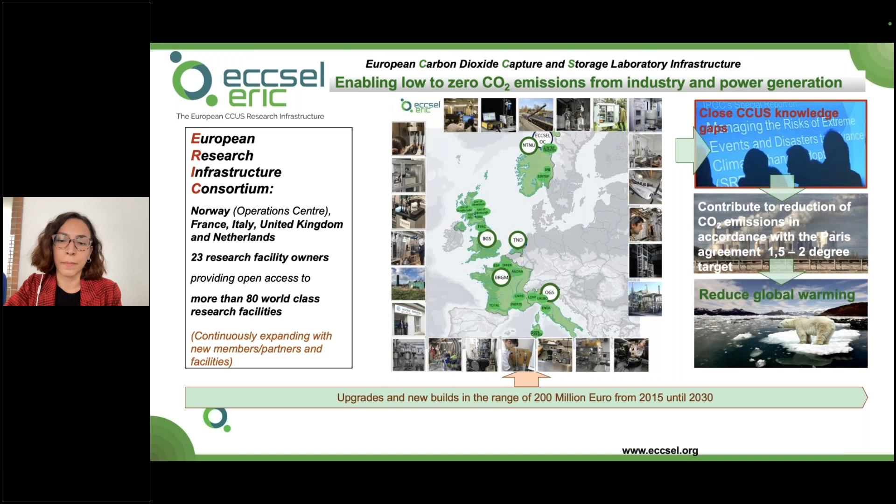Within the ECCSEL ERIC consortium, we have the ECCSELERATE project, which was initiated in 2020, and it will end next month, so at the end of 2023. This ECCSELERATE project is funded by the European Union, and it has many goals. So for instance, increasing the use and long-term sustainable operation of the infrastructure within the ECCSEL ERIC, but also developing marketing, access, and services models for industry and also small and medium enterprises, increasing the international collaboration and expanding the national nodes, and also expand research from CCS to CCUS, so also including utilization, and maybe expand research also on an industrial level.

In doing so, the ECCSELERATE project has a capacity building program with many activities inside. So one of these is, for instance, the series of webinars we are attending right now, but we also have specific workshops and summer schools and dedicated training courses.

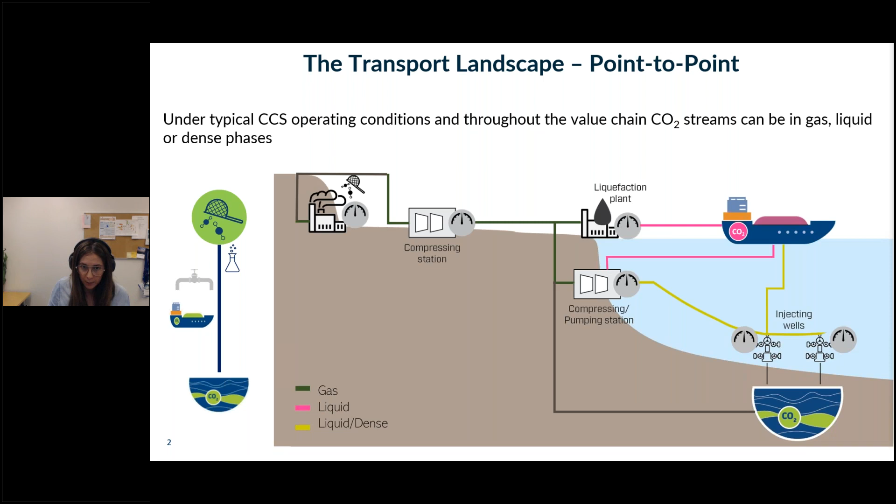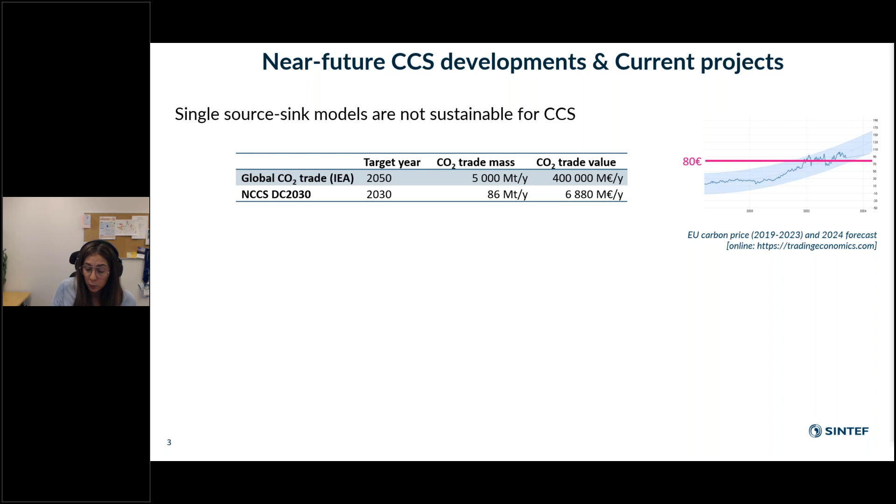However, if we look at the volumes of CO2 that we will have to trade and to inject in order to meet the climate targets, we see that these source to sink models are not sustainable for upscaling CCS. What we are seeing is that from where we are now, which is practically no CCS projects injecting CO2, to where we need to be by 2050, which we're talking around 5 gigatons of CO2 stored per year, we will need an exponential increase of the CO2 traded and injected.

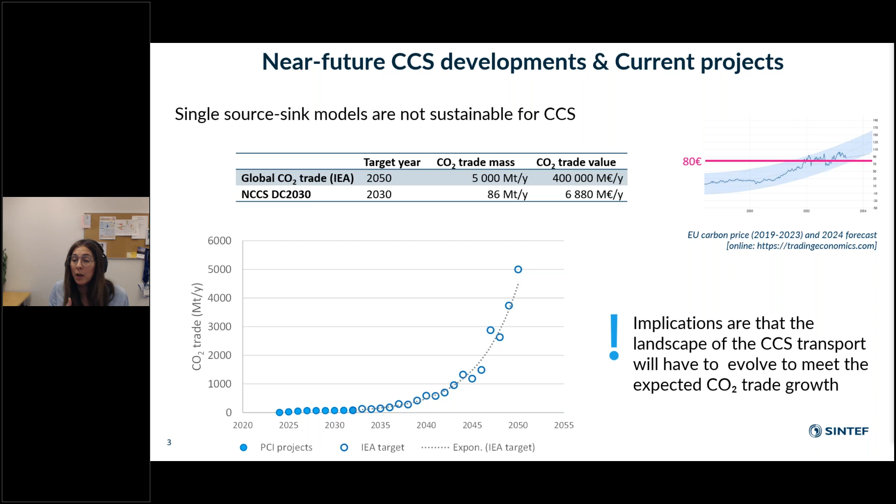And the implications of this is that the landscape for CCS will, of course, have to evolve in order to meet these needs. How we're seeing this evolution of the way we are transporting CO2 and the way also that we do business, is that we will go from this source to sink model that I told you was the simplest way, into networks. We are already seeing industrial clusters coming together into what will be capture clusters to collect CO2 and transport it to the reservoir point via whatever of the means of transportation that I mentioned.

Some of the interesting challenges of this type of CO2 networks is that, first of all, every capture plant will result in a different composition that will depend on the source of the CO2 and the capture process itself. So what we expect to have is an assortment of different compositions in this network, but also these capture plants will most likely not operate 24/7.

So this will give us not a transient effect, but more like a transient operation, where we will have variations in pressure, flow rate, and composition throughout the day or throughout the week. And this will be the new normal in the way we will operate CO2.

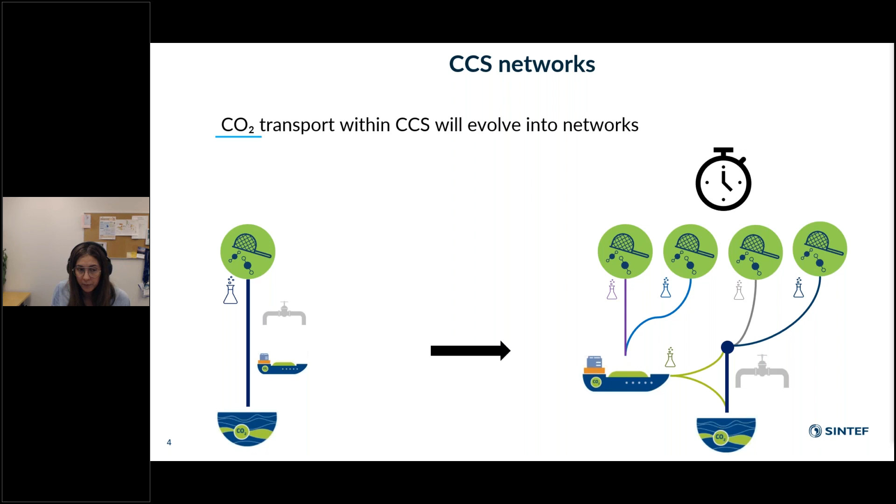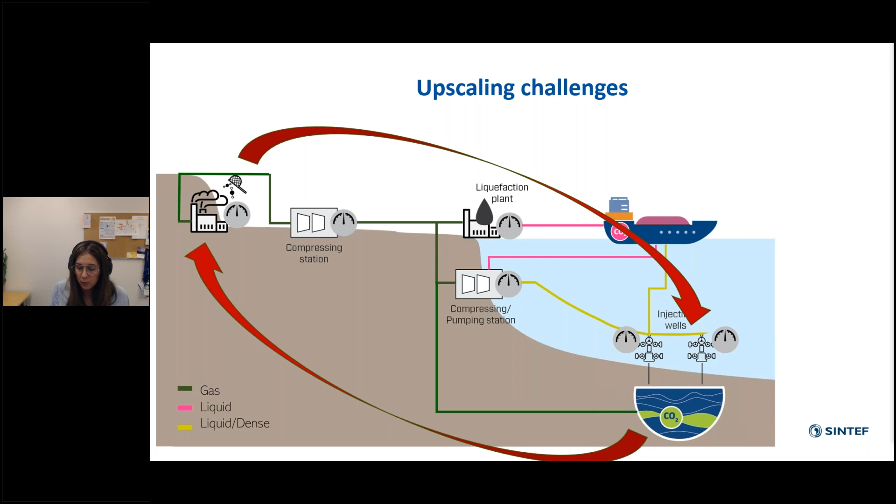If we look at the value chain of CCS, from the fluid perspective, it is a one-way value chain where we capture the CO2, transport it, and inject it, and hopefully it will stay injected for a long time for it to be CCS and for it to be sustainable. But if we look into the business perspective, it's more of a two-way value chain, in the sense that it is not until the CO2 is actually injected that the capture site can claim credits, which will be the CO2 injected minus the amount of CO2 that is emitted during transport, if we were to choose shipping or truck transportation.

So it is important to keep this in mind, because we will have to have an overview of the value chain, and we will need to think of the business in a bit of a different way, where we will have to have a complementary relationship of interdependence.

We will, of course, need to have field measurements, as with any other process and any other business, of mass flow rate, because that's how we are trading CO2, we're trading it in mass. If we have volumetric flow rate, then we will need to know density, and this we can do either via equations of state, if we know the composition and the models are accurate enough, or measurement of the density, and then, of course, other variables like pressure, temperature, and composition.

We also need to know, as with other processes, the uncertainties with which we are measuring those quantities. We need to start thinking about data integration, because we will need to integrate data from multiple sources and from multiple variables. The way we look at the value chain is also going to be slightly different from what we're used to in other businesses. So we need to start thinking about corporate boundaries versus having this value chain overview that will be needed for pretty much all the parties that will interact in the value chain.

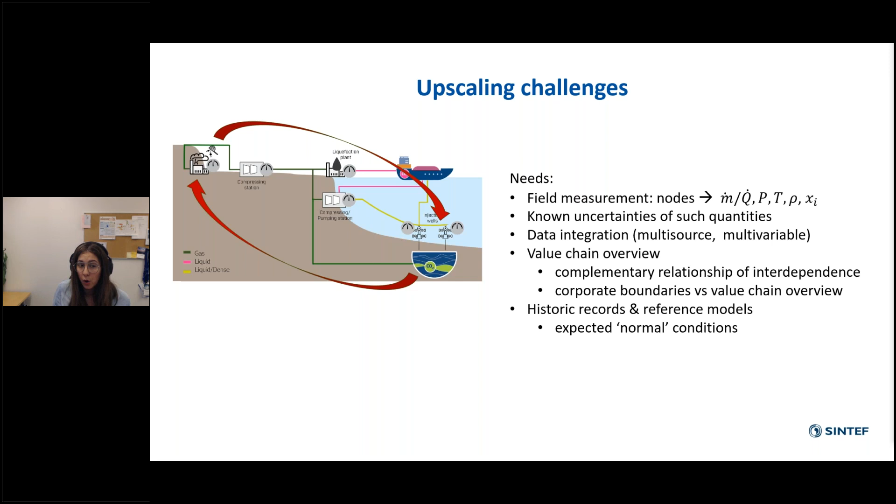And then the historic records, which for many processes set what is the norm of the operations. When we have transient networks, then we might need to rely more on reference models. And this is something that I will touch upon slightly on my next slide. So I come from a thermodynamics group here in SINTEF. So for us, of course, the thermophysical properties are at the core of our perspective, and I also believe they're at the core of the CCS transport scheme, and this is where I want to elaborate a bit.

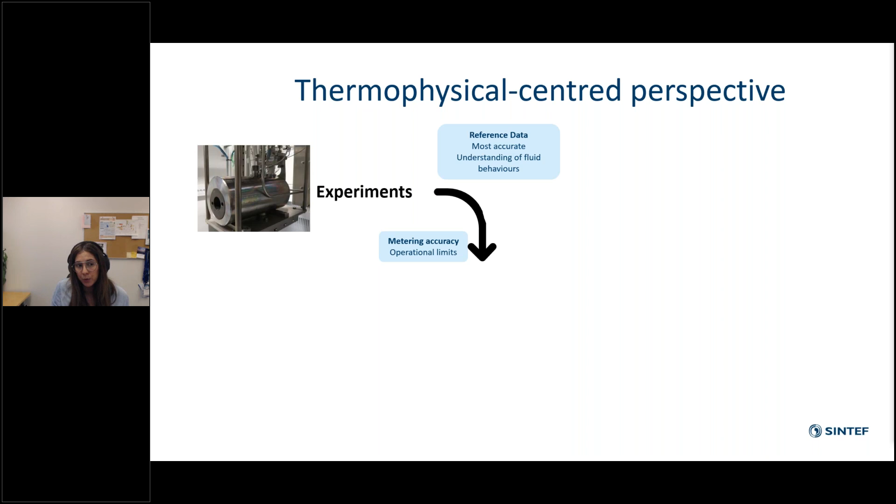So if we start with experiments, which is the most fundamental research we can do in this field, we could have many outputs, but for the purpose of this, let's imagine that I have two outputs. One is the reference data, which is the most accurate data we could aim for. This data is a true value, it's a reference value, but it is only true for the conditions at which it was taken, and it has certain uncertainty that will depend on the lab and on the method. But this becomes the reference data moving forward, and it allows us to understand how the fluid behaves.

Then we use this data for developing and tuning models. And what models do is that they allow us to actually use this data, because I have this data that is in points, you know, pressure, temperature, and this is my reality or my reference data at those conditions. And via models, I can interpolate between different sets of data and actually put this data to use. These reference models that we develop are then used for supervision, operation, and design.

And if we are based on models, and I will again talk a bit about this on my next slide, it also allows us to have a bit of an idea if what we're measuring in the field is an actual representation of the physical phenomena, or if it's coming from faulty sensors. From experiments, we also get information that goes pretty much straight to operators, and this comes in the form of metering accuracy and knowledge on the operational limits of the technologies that are going to be deployed. And Gabriele will tell us more about that.

And then we close the loop in a way between modeling and operation, because the field measurements, both current and historic data, are also used in modeling for tuning. So if we look a bit more into understanding the fluid's behaviors based on this accurate experimental data, these are some of the things that we need to know when we operate and that we get from these sources.

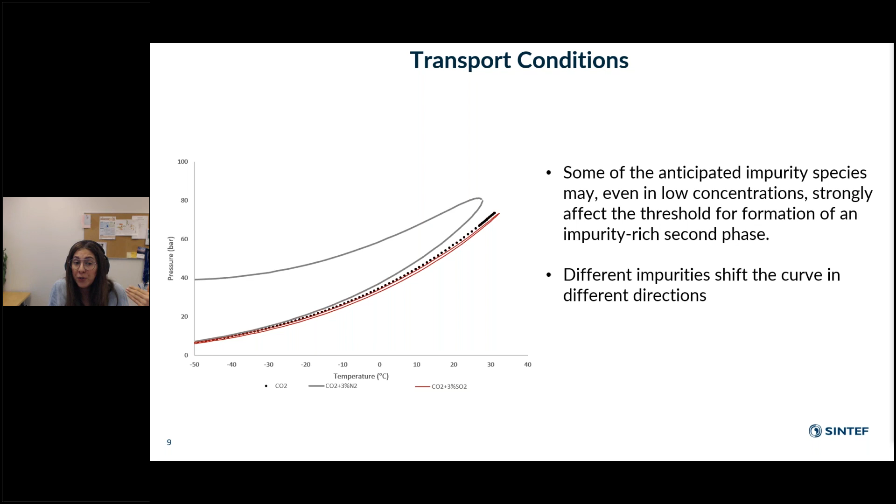So what I want to show you here is that if those 3% were not nitrogen but, for example, SO₂, not only is the phase envelope completely different, it's almost a line, it's very narrow, but it shifts the curve in a different direction. So it is important to understand what to expect from the fluid that I will be having in the field, depending on the composition, which we know will vary depending on the time of the day and week, as I said.

So if we look at just a simple example, and maybe I should try to get my pointer. Yes. At these conditions, 15 degrees Celsius, around 50 something bars, if I were transporting only CO₂, I would expect to be in liquid phase. But if I have impurities, in this case back to the 3% nitrogen scenario, I could be not only not in liquid phase, but fully in gas phase. And to actually get to the liquid phase is a difference of around 20 bars, which is not

depreciable. If we look at this, this is the pressure versus CO₂ fraction at these conditions, at this temperature, 15 degrees Celsius. What we're seeing, for example, in this line that I'm showing is this point in the middle of the phase envelope. What we see there is two phases coexisting, a liquid phase and a gas phase. And what I want to highlight here is that, for example, the gas phase, a second phase that is formed in the pipe, will not have 3% nitrogen, it will actually have something close to 8% nitrogen.

And then I will have a liquid phase that will be enriched in CO2, going from 97 to, in this case, 98. So what I want to highlight here is that, yes, we need to know how the fluid behaves. We need to know how the phase envelope changes depending on the composition or on the impurities that we will have there. But we also need to understand how, if I'm operating in the second phase, how that second phase will look like. And in this case, the second phase is pretty much out of the specifications.

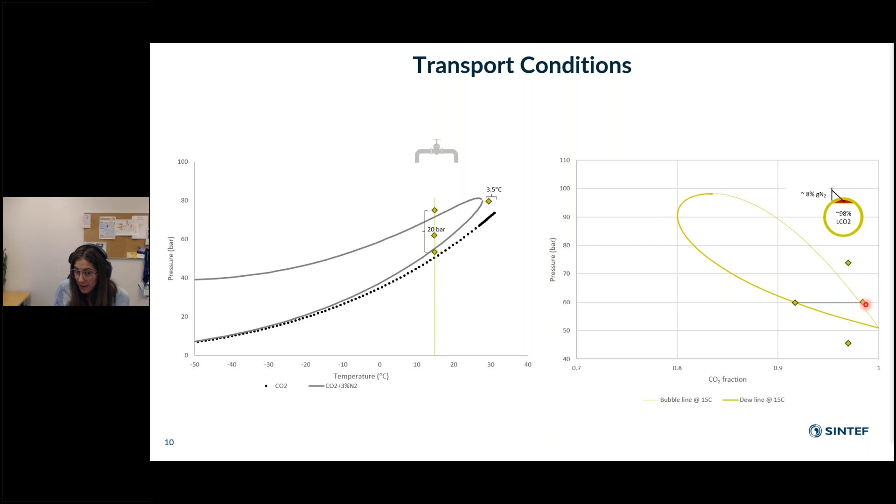And if we are thinking it's not nitrogen, if it's SO2 or SO3, then it has different implications for the integrity of my system. So all of this is data that we get from experiments. Now, we are also working a bit on understanding how we can deal with fault detection, how we can increase even further the reliability of our systems once they are installed in the value chain. So what I show here is just a roadmap for Internet of Things monitoring, and the QR code that you get there will take you to the paper.

And there are two methods. There is a data-driven method that relies on vast amount of historic data in order to characterize the behavior of a system, but it doesn't require knowledge of the mathematical model because it doesn't rely on a mathematical model. But we do need to know what are the capabilities of the sensors that we are using in the field, and that this needs to be verified. Their accuracy needs to be verified for pretty much specific mixtures at which we will be operating. And we need, of course, to have access to the historic data to, in a way, train this sensor fault detection based on data. And then we can also develop models.

These model-based approaches have gained popularity because of the theoretical methods. They also have high accuracy and they are quite effective. But it is of the utmost importance that we have models that actually are reliable and that have a high accuracy, because with flow models that don't have the accuracy that we would need, then of course the model-based sensor fault detection will fall short.

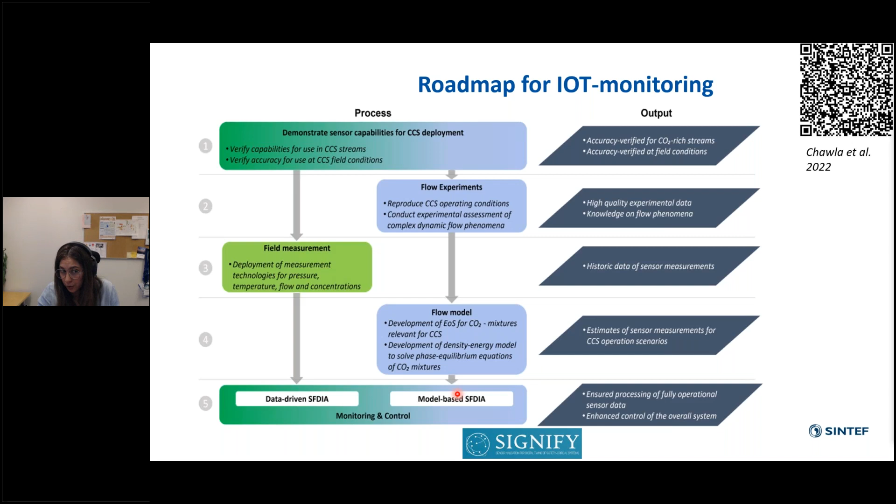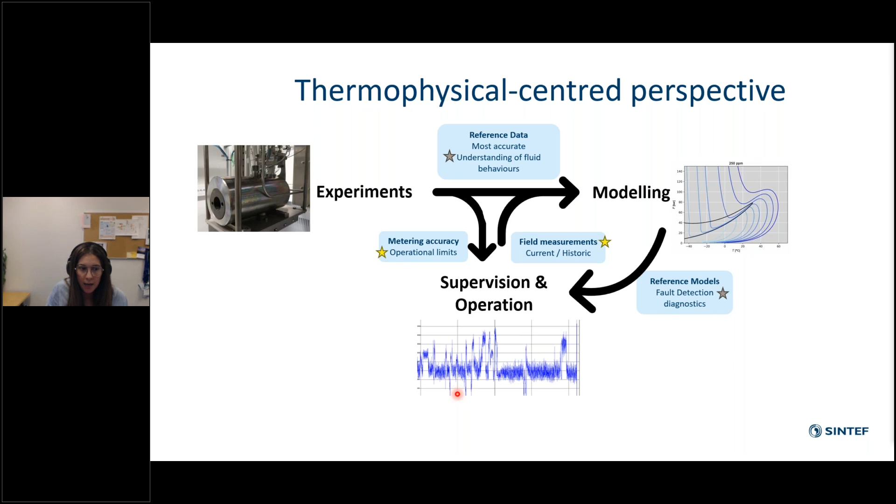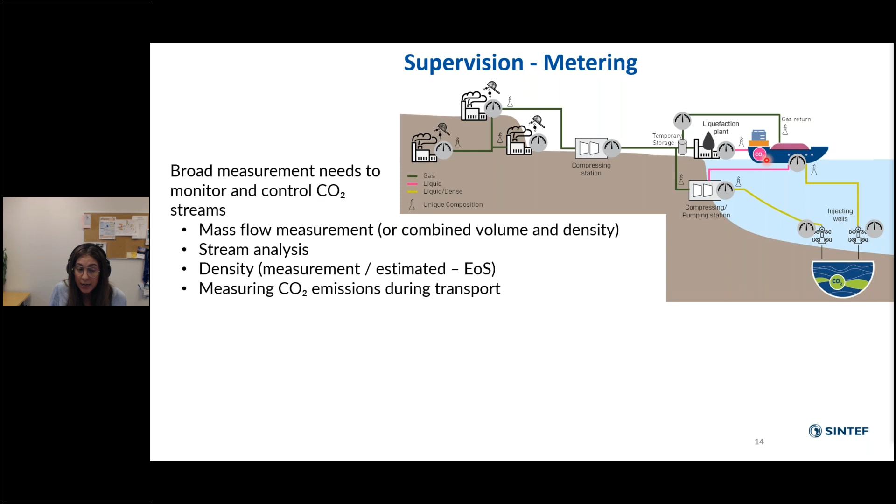Now I will discuss a bit more about measurement in the field and accuracy and operating limits. I have already mentioned that there will be broad measurement needs throughout the value chain. We will for sure need mass flow measurement, not only to control our system, but every time we have a custody transfer in the value chain. We will necessarily need to know what is it that I'm transporting at different points in the value chain, at least whenever I have joining currents. I will need to know the density, either by measurement or by estimating it with equations of state. And I need to know how much CO2 emissions are being released during transport.

Depending on what is it that I need these measurements for, I will need different accuracies. And the most strict accuracies are those that involve money, fiscal metering. And of those, for example, the one for liquid is perhaps the most strict one that requires 1% accuracy per meter that is going to be installed in the field. But there are other regulations, other indications of how things might move forward in the future.

The European taxonomy, which, as you know, sets guidelines to define what activities within which companies are sustainable or not, requires that not more than 0.5% of the mass being transported could be leaked. So then that means that we need accuracies lower than that in order to be able to prove that we are complying with that figure, and then that our system or our process is sustainable.

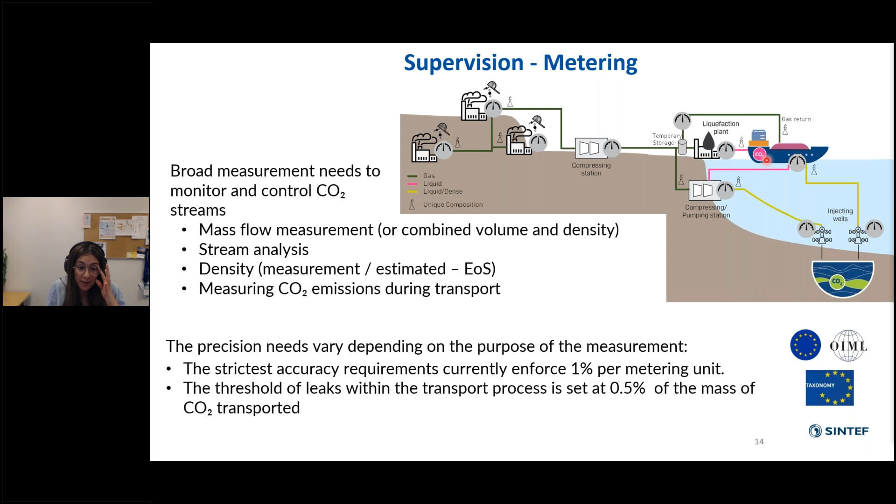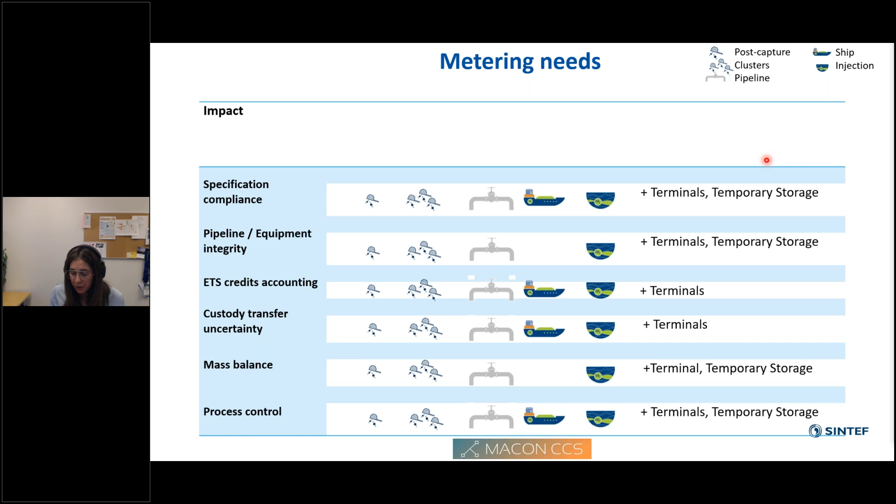And you see them for every objective. We see where we will need to have some measurement points of certain characteristics. So capture sites, capture clusters, pipelines, shipping terminals, including terminals, injection, and temporary storage. And then we try to match that with what is the measurement? What is it that we're measuring?

We will need to measure composition and water dew points. We will need to measure mass flow rates or volumetric flow rate plus density. And we need to measure level when we have storage. And we will need to identify if I have a second phase that could either impact the integrity of my equipment or could decrease the accuracy of the metering system that I have downstream. And then we matched in a way all of them.

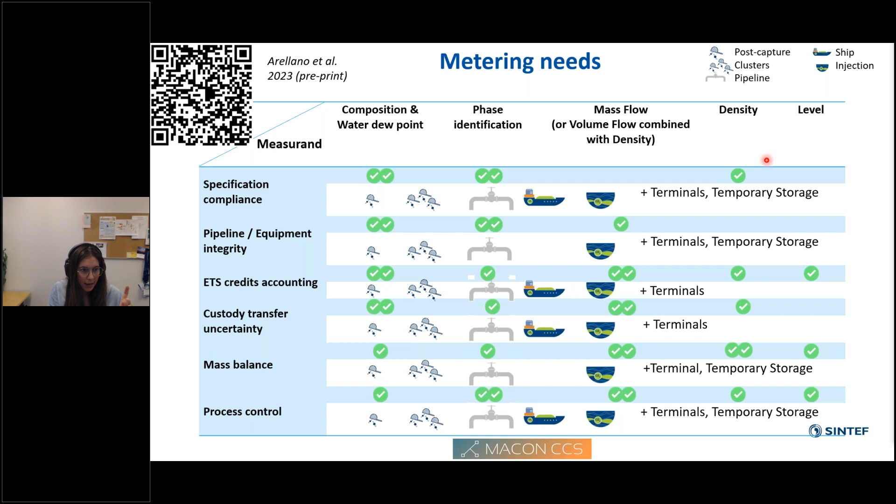So I don't want to overwhelm you with all of this. Again, in the QR code is the preprint of this work. But just to show you a bit how it works, if we start with custody transfer, the double ticks mean that we will for sure need this. So we will for sure need custody transfer. For custody transfer purposes, we will need to know the composition of our stream, and we will need to know mass flow measurement. If we don't have mass flow measurement, but volumetric flow measurement, then we will need density.

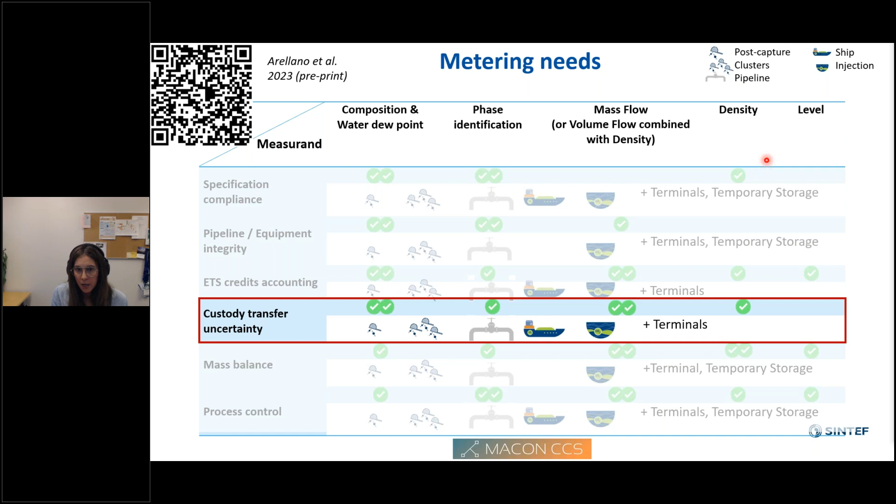And some or most of the meters are quite sensitive to having a second phase. So then we will benefit from second phase identification. So all of these subjects are things that we are working on. Some of the earliest movers or things that we're working on now to partially abate some of these obstacles are the ones that I highlight here. It is still a complex task in hand, so it involves international cooperation and a mixture of funding opportunities.

So just to highlight some of the work that we're doing, we are developing primary flow reference equipment and materials, at a European level, as part of MetCCUS, which is a project funded by Euramet, and at a Norwegian level by Preference, funded by the Research Council. We are, SINTEF together with NEL, looking into opportunities for European large-scale metering facilities for liquid CO2. We are looking into developing monitoring tools.

Again, as part of a European project, CoreU, we are advancing the state of the art of measurement technologies, not only for fiscal metering, but to match this mesh of needs and challenges. And we're working on verification and validation of data from sensors in a project called Signify with NTNU.

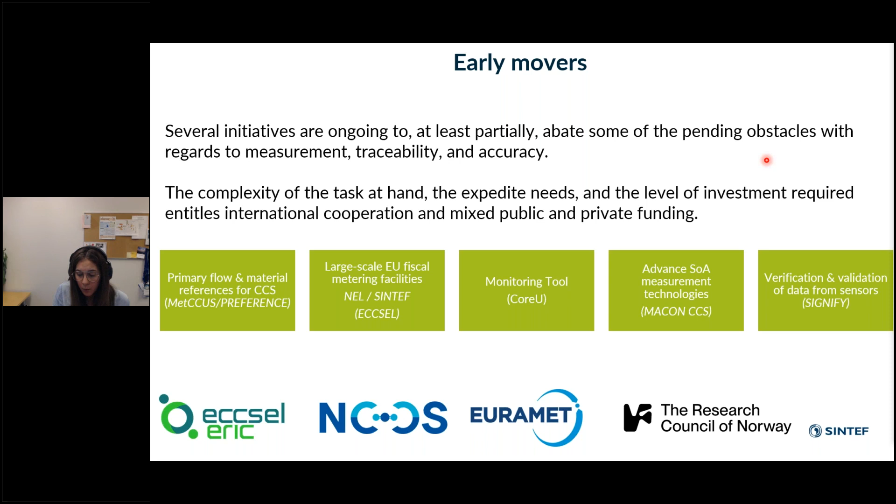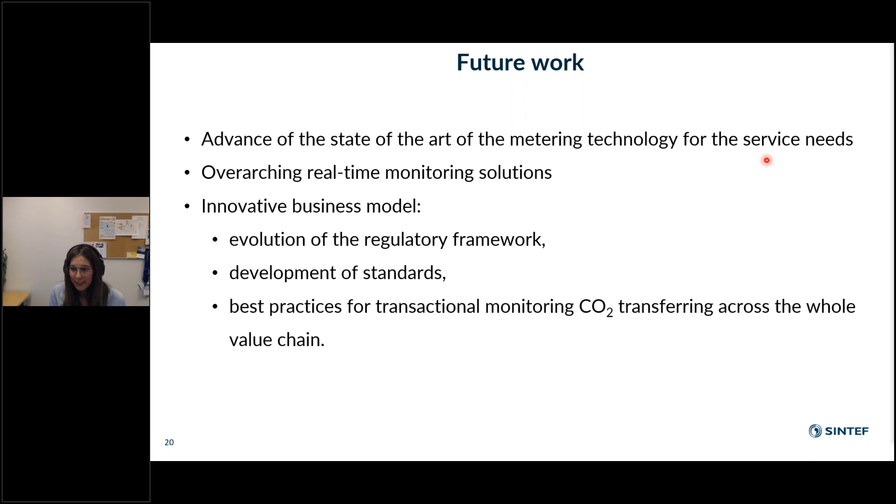So, like I mentioned, there is still a lot of work to do. We need to advance the state of the art of the metering technologies. We need some type of overarching monitoring solution through the value chain to be able to do some sort of CO2 tracking. And not less important, we need innovative business models that involve evolution of the regulatory framework, development of standards, and best practices for transactional monitoring of CO2. So this is what I had to show you.

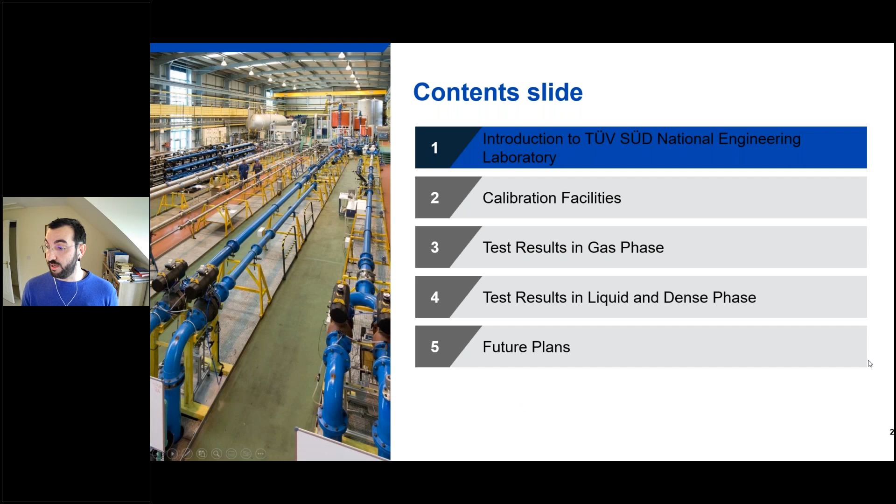So I'm going to present some of the test results we got so far on Coriolis meters with CO₂. So this presentation will be focused on Coriolis meters mainly. So first we start just with a very brief introduction of TÜV SÜD National Engineering Laboratory, then touching on calibration facilities, why they're important, how many there are. Then some test results in gaseous phase, some test results in liquid and dense phase, and just future plans we have at the minute.

So what is the National Engineering Laboratory? If you're not used to us, we are the designated institute for flow metrology in the UK. So we hold the UK national standard for flow measurement. We were a UK government research laboratory in the past and then privatized, now part of TÜV SÜD. And our expertise is in flow measurement from many years, and we are also driving international standards at ISO and BSI level for flow measurement.

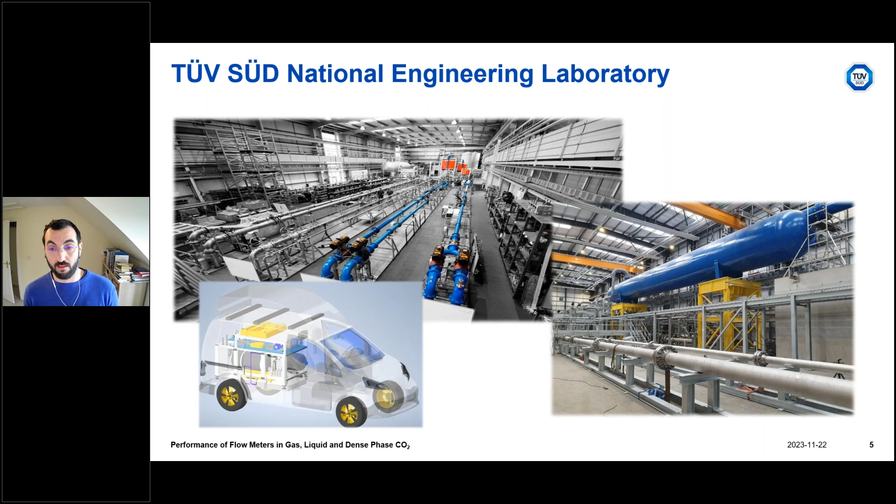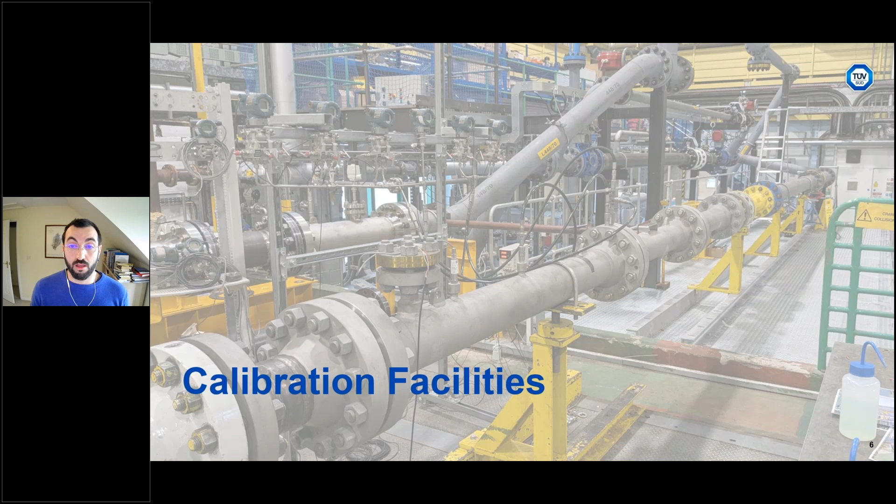So what about calibration facilities for CO₂? In this picture, in the background, you can see our CO₂ gaseous calibration facility. That's nominally 8-inch. So as Jessica was saying, we will need to measure the mass of CO₂ along the CCUS chain for several reasons. So we will need a metering skid at several locations, and we will need to ensure the quality of that measurement. So quality assurance will be a key aspect.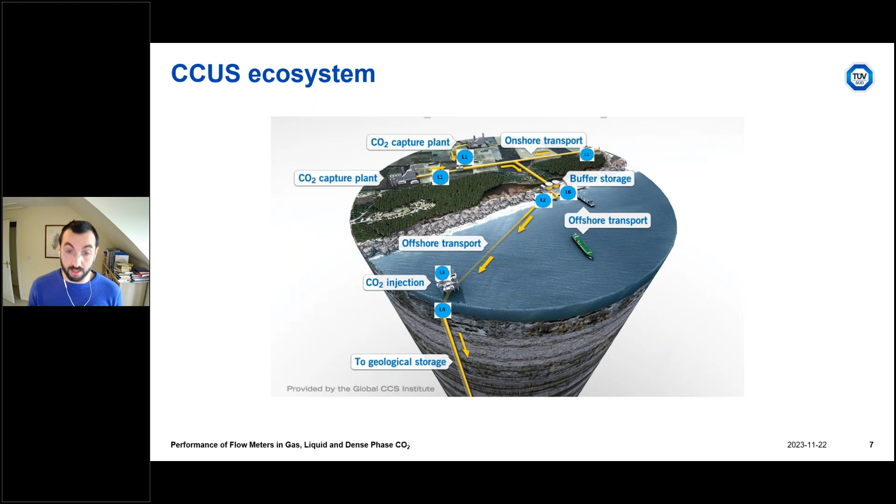One important step in quality assurance is calibration and recalibration, so before installation and after installation during operation. So how do we do that? One option is to take out the flow meter and send it to a calibration lab. So where are the calibration labs for gaseous CO₂?

I've tried to put them in a slide, and apologies, this is based on my best knowledge. I identified 3 ISO 17025 accredited facilities, one in Canada, Fortis BC, one in the Netherlands, DNV, and one at TÜV SÜD in the UK. And there is also another facility, IFE in Oslo, Norway, which is nominally 2-inch, but to my knowledge is not accredited. I didn't include any facilities below 2-inch, but there are some out there, also at university level and so on.

And I've tried to calculate the maximum flow rate in MTPA that they can calibrate at, just to give a feeling of the magnitude we can go with. So to be honest, for gaseous phase, we can improve, but there is already something there, right?

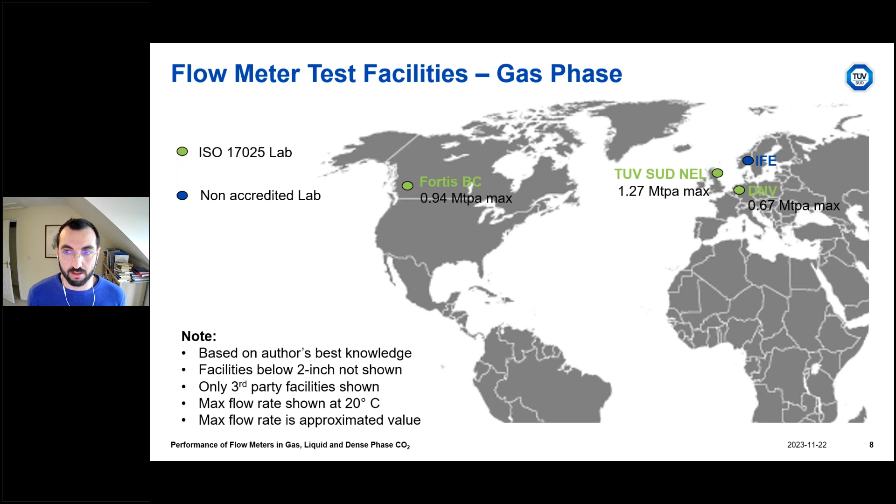What about the liquid and dense phase? Well, that's another story. It's a bit different, and there are scarce facilities out there for calibration. Again, IFE in Norway has a 2-inch facility that can go in liquid and dense phase. And the other one is the one we are building at TÜV SÜD National Engineering Laboratory in the UK. But again, it will be a 2-inch facility.

And the primary purpose is not really about calibrating big meters. It's about conducting the fundamental research for assessing the transferability of calibration between CO₂ and other fluids like water. That facility will be a primary standard facility, so a first of its kind, and we will do research with impurities.

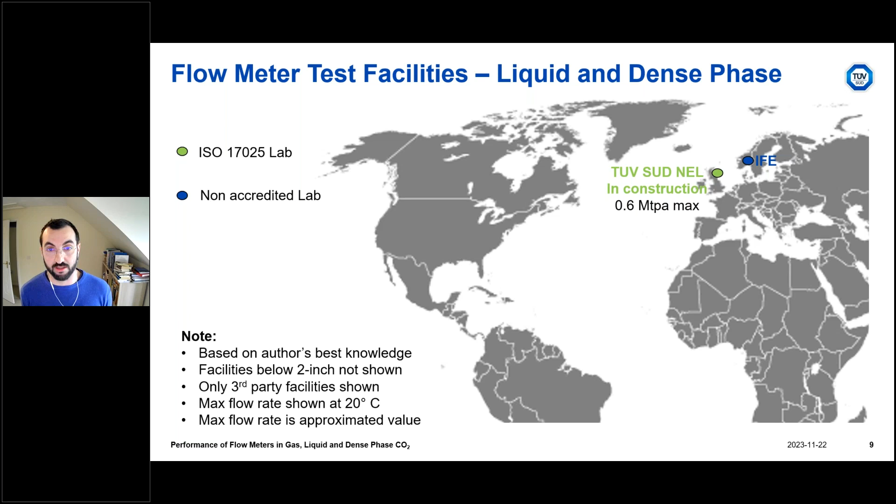To be honest, there are also plans at SINTEF and at DNV in the Netherlands to build facilities. But again, to my knowledge, they are working on that, but they are not yet at the stage of having the funding to build it. So that, I hope, gives you the landscape.

So I've tried to put some of the rationale here, but the next question to me is, can we calibrate with an alternative fluid instead of having a CO₂ facility? And the reason is, obviously, as I was showing, there is a lack of calibration facilities around the world, especially for liquid and dense phase. The existing ones are restricted in operating conditions like sizes, maximum flow rate, pressure and sometimes temperature.

And there will always be a degree of transferability. We can't match exactly every single operating condition around the world, especially the concentration and impurities. It would be very expensive and time consuming to calibrate each single meter exactly at its operating condition. The other point is there are a lot of water and oil calibration facilities around the world. They are accredited, very well established, very low uncertainty, and the same for natural gas and nitrogen.

Third point, and in this case, I'm focusing on Coriolis meters. The transferability of calibration for Coriolis meters has been proved for several fluids for oil and gas applications. So I put a recent paper here, presented at the Global Flow Measurement Workshop. One of the co-authors was my colleague Chris Mills. I think it's a very good paper, so if you are interested, it goes into the detail of calibrating Coriolis meters with alternative fluids.

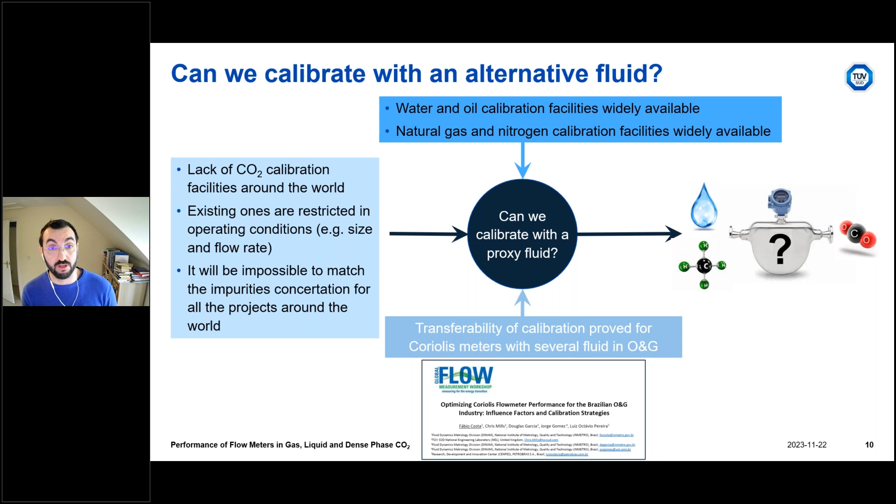So the question really now I'm trying to touch upon is, can we calibrate a Coriolis meter with an alternative fluid and use it with CO2? What do the test results tell us? So let's start with test results in gaseous phase. And you will see I'm always starting small scale and moving to larger scale.

And in this case, we are starting from a Coriolis meter, which is a 1/4 inch in size. And that was tested at Heriot-Watt University as part of a PhD collaboration between NEL and Heriot-Watt. So the credit here for all this nice and great work goes to the PhD student, Johnson Jimba. And we have also tested at NEL, that's on the right-hand side. So the left-hand side is the benchtop facility at Heriot-Watt University.

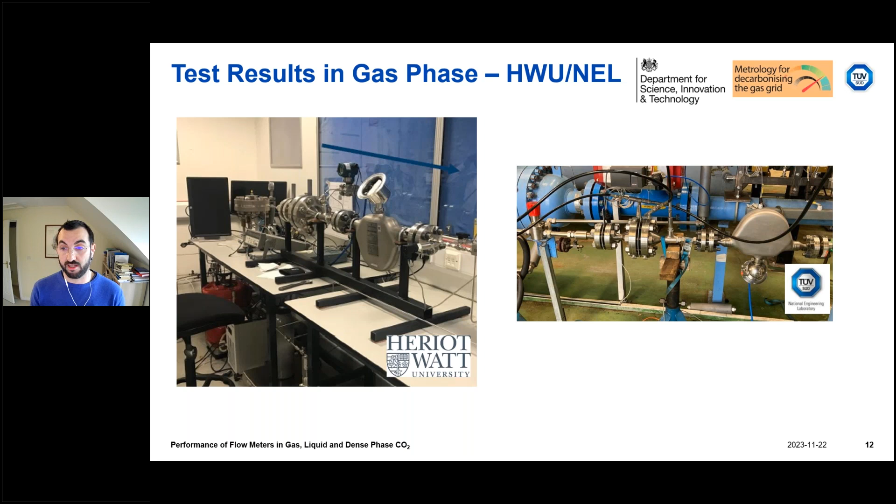But we need to be careful here, because the 2.5% is on pure mass of CO2, while the Coriolis will measure the bulk flow. So we need to account also for the composition analysis uncertainty. So we need to be careful, but we are well within it. And you may say, well, that was pure CO2. We don't have pure CO2. What's happening when we put impurities?

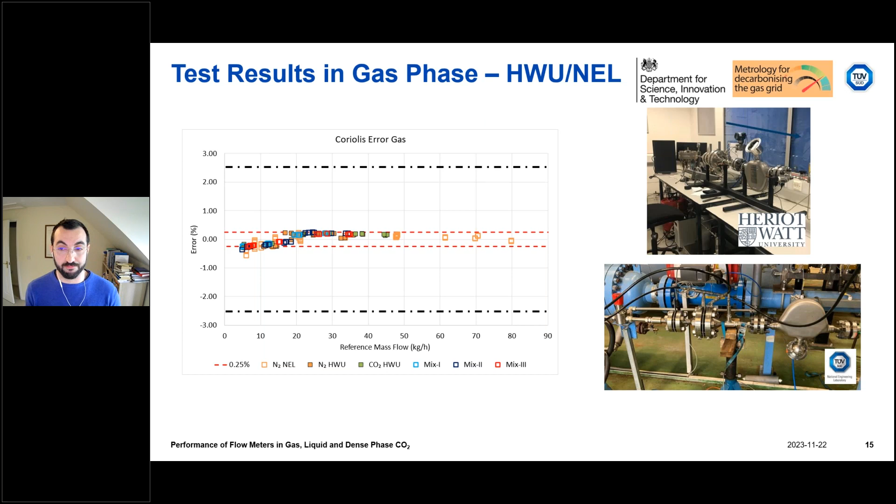Some mixtures were tested by Johnson, and although they are not representative of all the mixtures out there, the results look good and still in line with the pure CO2. So that's the first nice result. The second one is some tests that we recently completed at NEL, in our gas CO2 facility.

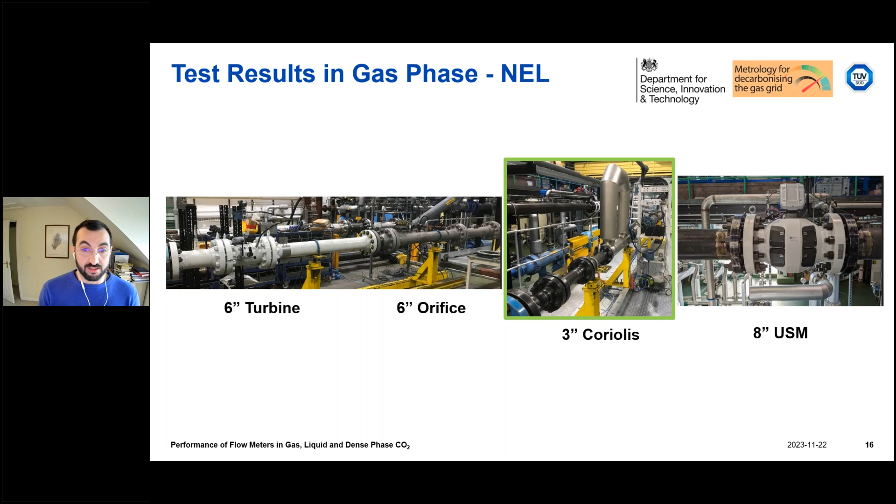We have tested, you can see, 4 meters, so a turbine, orifice, Coriolis and ultrasonic, but I'm going just to show you the Coriolis results. So we tested again in nitrogen in this case, and with pure CO2, a 3-inch Coriolis meter, and you can see again within plus or minus 0.25 other than the low end, and CO2 and nitrogen agree pretty well. So it tells a similar story. Again, in perspective of the 2.5%, well within it.

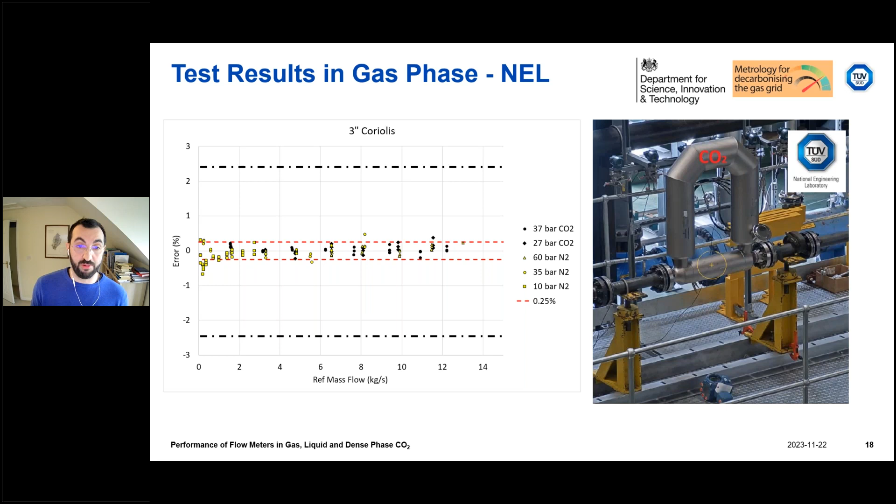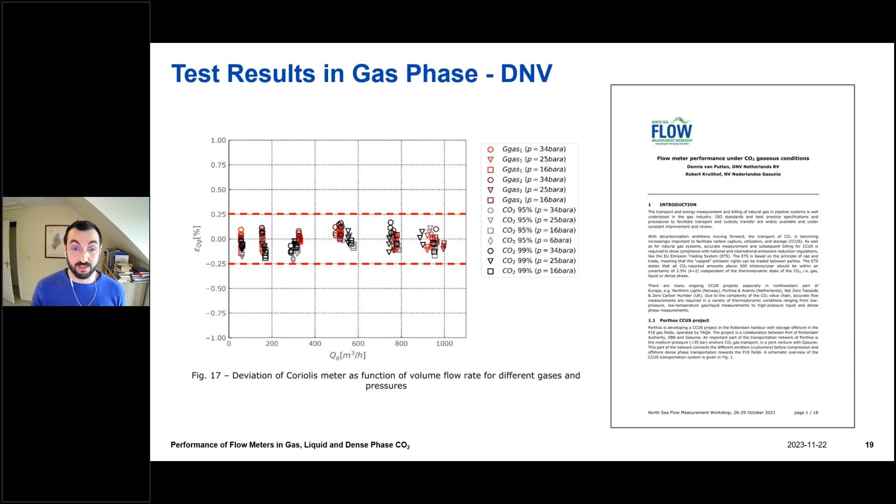So also look at what is out there. A very good paper from DNV, I think, yeah, 2021. You have the reference there, so you can read it. I recommend that. So they have tested again different meters, and in this case, I'm showing the result for a 2-inch and a 3-inch Coriolis, tested with natural gas and with CO2 at 95% and 99% concentration, different pressures, and again within plus or minus 0.25. And the Coriolis was previously calibrated, if I'm not wrong, at the manufacturer factory in water. So the transferability of calibration seems to hold also in this case.

Another lab, FortisBC in Canada, and this is a 2022 paper. You have the reference there, again from the Global Flow Measurement Workshop. Similar story. Calibrated with water is the black dot, with natural gas and with CO2, and results are still good. And if I'm not wrong, again, this was calibrated initially with water, and it's, I think, a 6 to 8-inch Coriolis. I think it's a 6-inch Coriolis, but you can check in the paper.

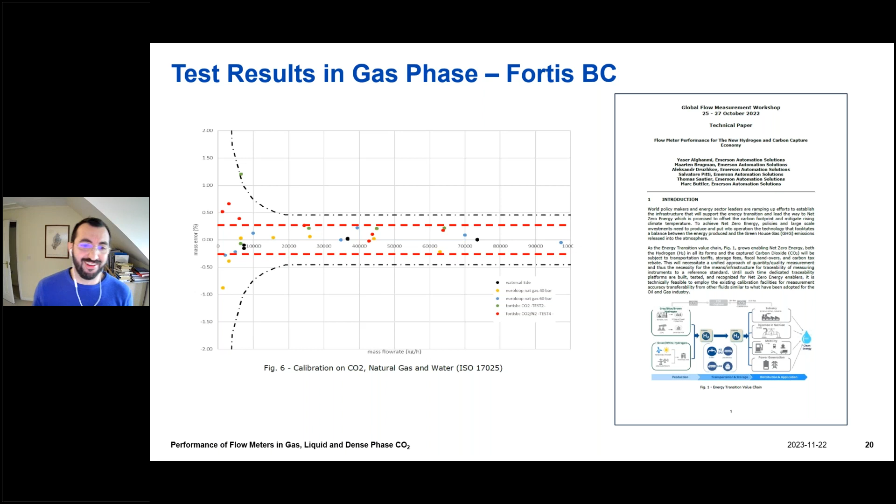So first bit of conclusion. We have 4 different labs, different scales, but similar results. So to me, that seems a piece of evidence starting to appear. And these results suggest that a Coriolis meter can be calibrated with alternative fluid and used with gaseous CO2.

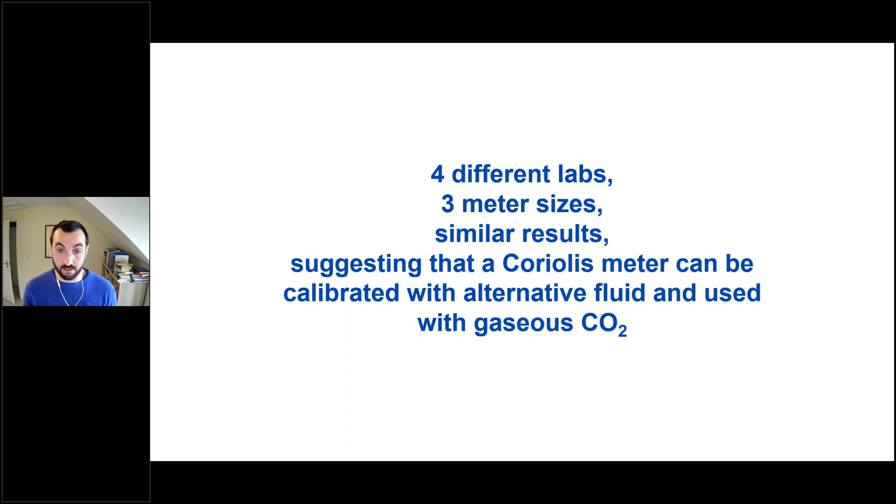Moving to liquid and dense phase, we have done some testing there as well. Again at Heriot-Watt University, with pure CO2 in this case, you have the graph there. We have tested with different pressures and, most importantly, with different temperatures. So you have 22 degrees and you have 34 degrees.

34 degrees are the red triangles. Again, error on the y-axis and mass flow rate on the x-axis. And it's still the same 1/4 inch Coriolis. So good results, to be honest. One thing to flag is the shift that we have observed when we move from 22 degrees to 34 degrees.

We're still investigating that shift, whether it's actually related to the Coriolis itself or maybe an artifact of the test. So further research is needed here. But you may say, why is 34 degrees important? Are we operating at 34 degrees? Potentially, if we are downstream of the compressor and in close proximity, we can have a bit higher temperature than just ambient temperature.

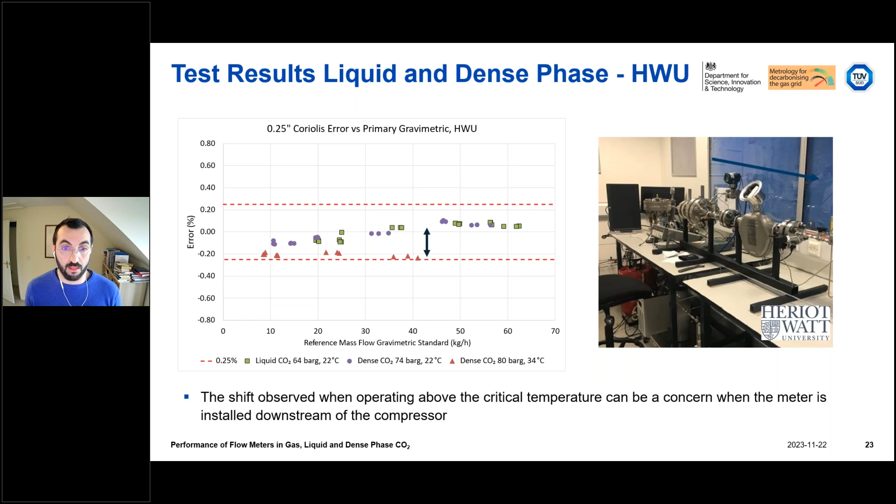And I'm aware that there are projects operating at 60 and 80 degrees, if I'm not wrong. So if this shift is true, it needs to be assessed and we need to include that in our thinking. Luckily, Heriot-Watt University and NEL were able to recently secure some other funding, IDRIC Flexible Fund Round 4, to conduct further research on this shift.

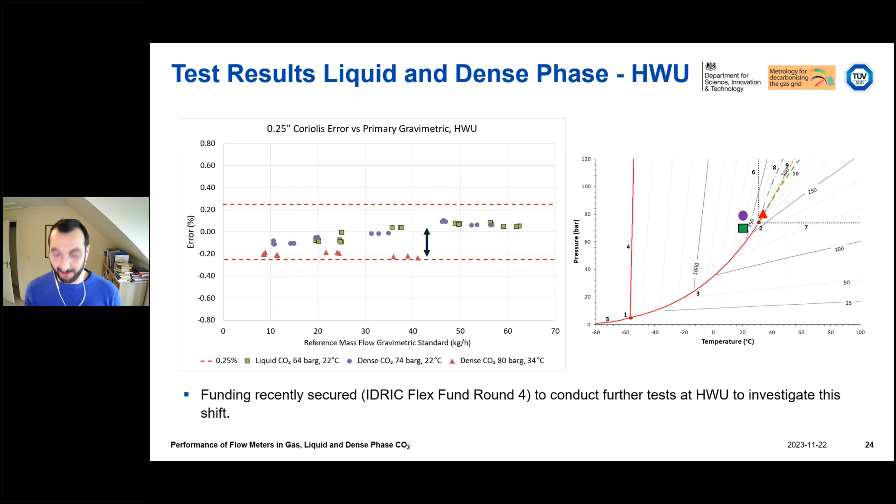I also plotted on the right-hand side the phase diagram for pure CO2. You can see that the red triangle, which is 34 degrees, is pretty close to the Widom line, which is the region where we have large gradients of fluid properties like density. So we need to be very careful operating in that area, but it's also very interesting from a scientific point of view. So hopefully nice results are ahead of us.

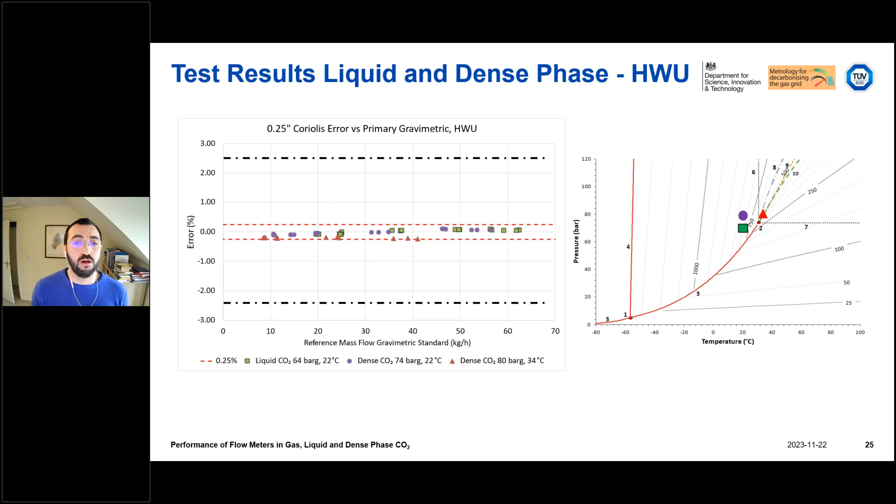Again, put this in perspective of the 2.5%, just to give a feeling of where we are. The scale is important, and we are well within. And what about impurities? Mixtures were tested by PhD student Johnson at Heriot-Watt University, and again we have consistent behavior there. I also put some of the outputs of this work that you can find in the open literature here.

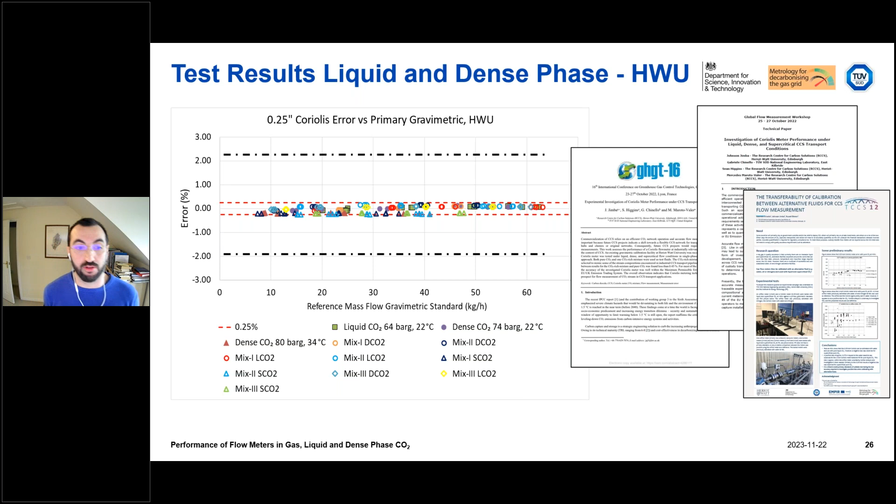Then we move to slightly larger scale. As I was saying, we started small and go to large. In this case, we tested 5 different flow meter technologies at the Institute for Energy Technology in Norway. From right to left, a 2-inch orifice, a 2-inch ultrasonic clamp-on meter, a 2-inch liquid turbine, and a 1-inch Coriolis. And to be honest, they all did very well.

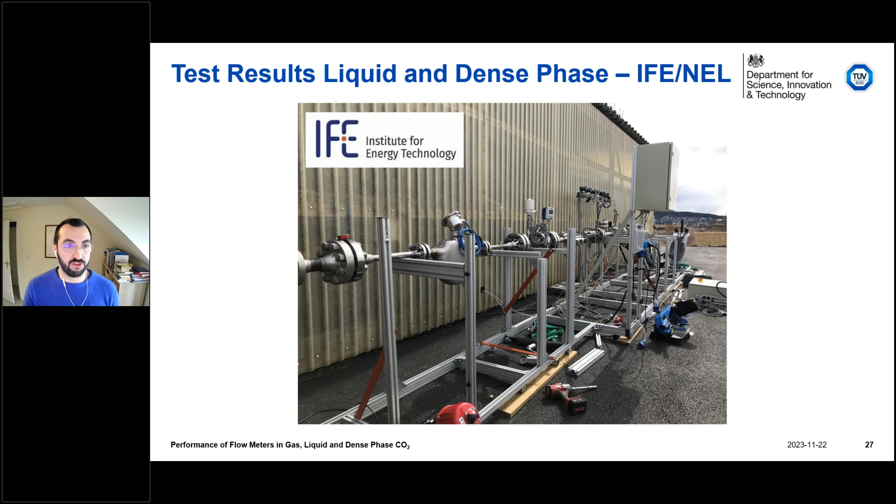I was particularly surprised by the clamp-on ultrasonic, which gave very good results, above my expectations, to be honest. That was a very nice surprise. But we will concentrate on the Coriolis for this talk. One thing to point out is there is no primary standard or traceability at the IFE lab. So we needed to figure out the true flow rate in that pipe, and we can't do an absolute comparison.

What we did is a relative comparison between the 5 different metering technologies. For this work, we took as the reference value the value from the orifice meter. Obviously, we calibrated the orifice meter, assessed its performance, and ran an uncertainty budget. So we did all the checks and homework necessary to give confidence that it's a good value. And we tested different conditions.

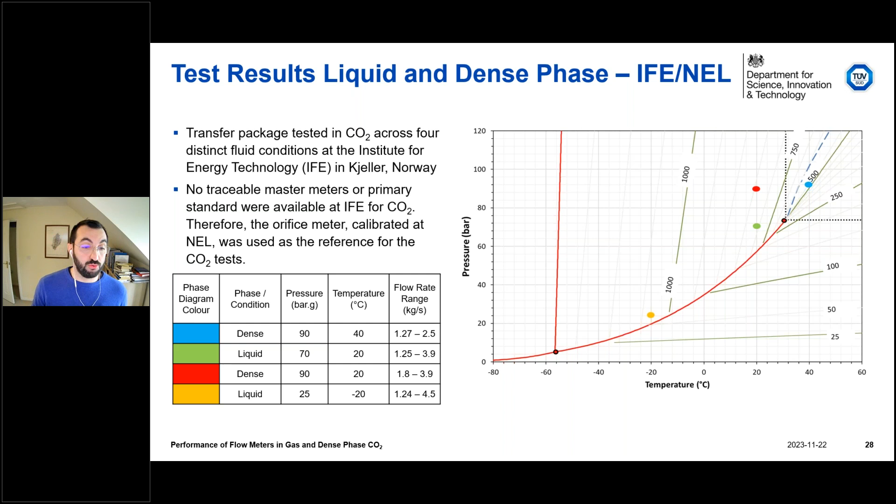You can see 4 conditions of pressure and temperature here, plotted against the phase diagram for pure CO2. We start at -20 degrees, close to shipping conditions, and go up to 40 degrees Celsius, with pressure between 25 bar and 90 bar. These are the results presented and published by my colleague Russell Brown at the Global Flow Measurement Workshop in October this year. On the left, you can see the results.

The y-axis this time is the relative discrepancy between the Coriolis and the orifice. Let's have a look at the results, starting with the square marks. The square marks are the difference between the orifice and the Coriolis when we tested in oil, the brown marks, and in water, the blue marks.

You can see that in water and in oil, which we tested in our facilities, the 2 meters agree pretty well. We are below 0.1%, so they're reading the same or close to it. And there you have all the other marks, the triangles, which are with CO2 at IFE.

The results are not bad. We are close to the 0.25%, but we can see a shift between water and CO2 in this case. And we have done further analysis, and we will publish all our results and thinking in a journal paper, also with the results for the other flow meters.

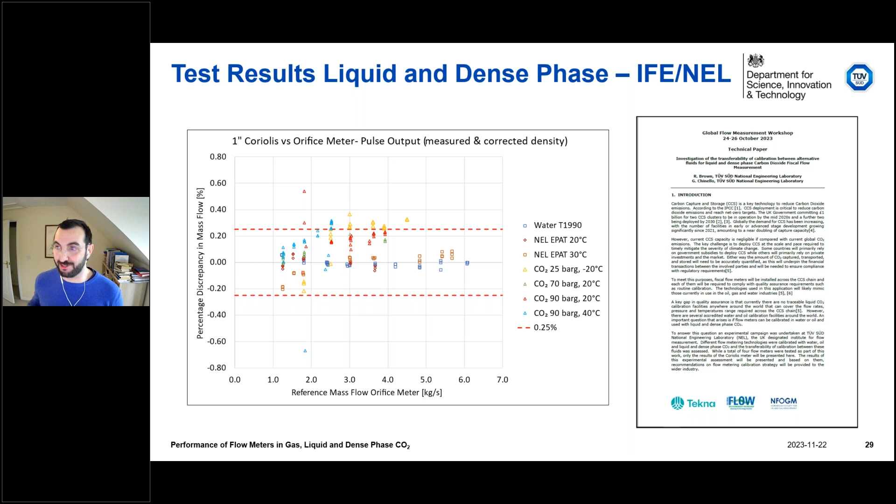Again, from the 2.5% perspective, if I go back, yes, we are still well within the 2.5%, right? If you look at that. So, to conclude on this case, early experiments suggest that a Coriolis meter could be calibrated with water and used with liquid dense phase CO2, but I really stress that we need further research for that. And this is part of our future plans.

So we are partnering with 20+ partner organizations around Europe in a project called ENCASE. And as part of that, there are a lot of work packages. It's not just flow. There are equations of state and pumps and investigation of their performance, modeling of the network, and so on. But for flow measurement, one of the activities is for us, NEL, to build the liquid and dense phase primary standard facility that I was mentioning before, and do the research including impurities. And we will also do research on sampling and analyzer systems, how they perform, and on density measurement.

But we also have other plans, like going back to IFE next year and doing further research there in dense and liquid phase with a different meter and with extended conditions. As Yessica mentioned, we are both part of MetCCUS, another big European project, where we are developing a primary standard for gas and doing further research for gas.

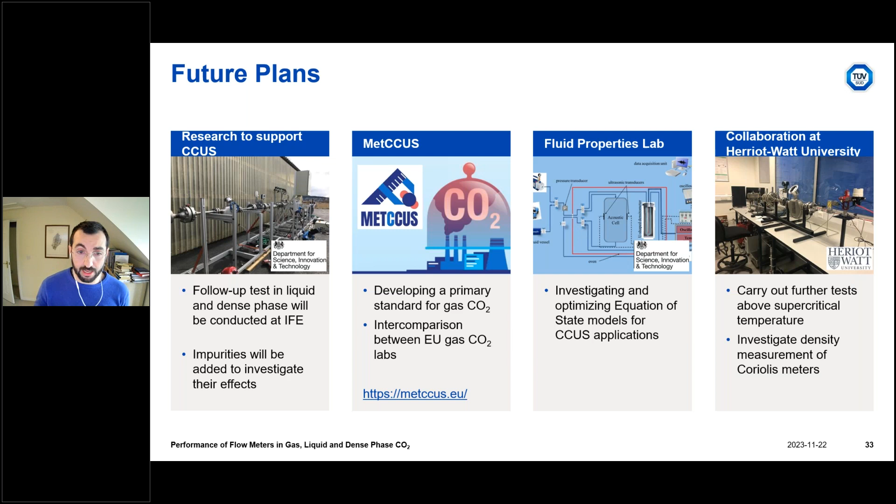And the idea behind this piece of work is to start creating that framework for standardization. So the idea is to provide a first piece of work which provides a knowledge base for standardization in this area, because ultimately, as I was saying, that's what we are aiming at: to have standardized operation, to have best practice guides in place, and to support industry in scaling up CCS. And that's all from my side.